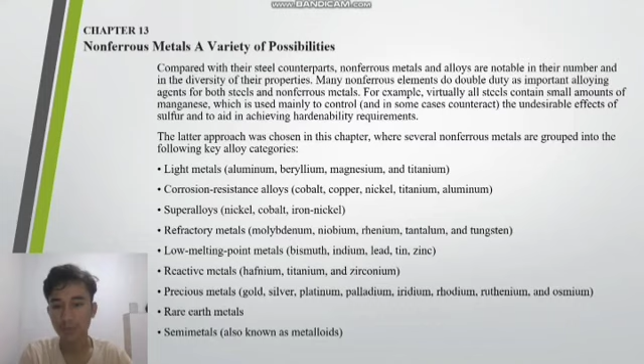The latter approach was chosen in this chapter, where several nonferrous metals are grouped into the following key alloy categories: light metals: aluminium, beryllium, magnesium, and titanium. Corrosion resistant alloys, that is copper, nickel, titanium, aluminium. Superalloys, that is nickel, cobalt, iron-nickel. Refractory metals: molybdenum, niobium, rhenium, tantalum, and tungsten.

Low melting point metals: bismuth, indium, lead, tin, zinc. Reactive metals: hafnium, titanium, and zirconium. Precious metals like gold, silver, platinum, palladium, iridium, rhodium, ruthenium, and osmium. Rare earth metals; semi-metals, also known as metalloids. Next,

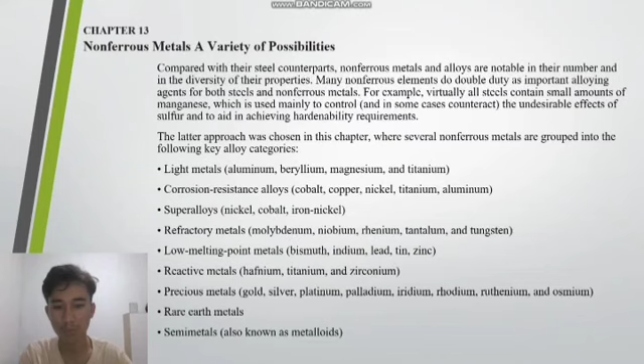13.1 Light metals. High strength, lightweight alloys are of great importance in engineering applications for use in land, sea, air, and space transportation. 1 kilogram or 2.2 lb of metal saved in the design and construction of such a system can result in important weight savings in power plants, transmission systems, and in total fuel requirements. There is a strong demand for high strength, lightweight metals and alloys.

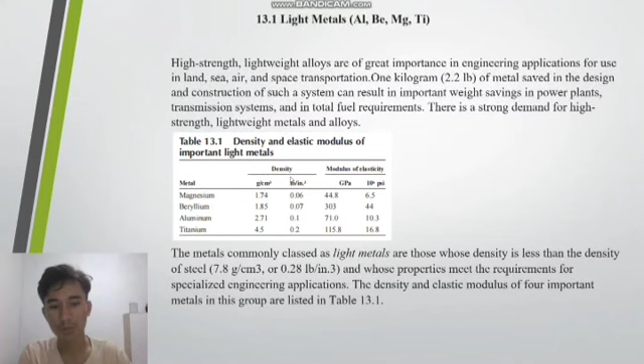This is table 13.1. The metals commonly classed as light metals are those whose density is less than the density of steel, or 7.8 grams per cubic centimeter, or 0.28 lb per in³, and whose properties meet the requirements for specialist engineering applications. The density and elastic modulus of 4 important metals in this group are listed in table 13.1.

Next, magnesium, or Mg, has long been recognized as the lightest structural metal. Structural applications include industrial, materials handling, commercial and aerospace equipment. In industrial machinery, such as textile and printing machines, magnesium alloys are used for parts that operate at high speeds and thus must be lightweight to minimize inertial forces. The use of magnesium in materials handling equipment includes applications for dockboards, grain shovels, and gravity conveyors. Next,

13.2 Corrosion resistant alloys. Nonferrous metals and alloys are widely used in corrosive environments. At one end of the spectrum, they are used for water piping and food preparation. At the other end, they are vital to operation of many chemical plants dealing with aggressive acids and alkalis. Historically, titanium alloys have been used instead of iron or nickel alloys in aerospace applications because titanium saves weight in highly loaded components that operate at low to moderately elevated temperatures.

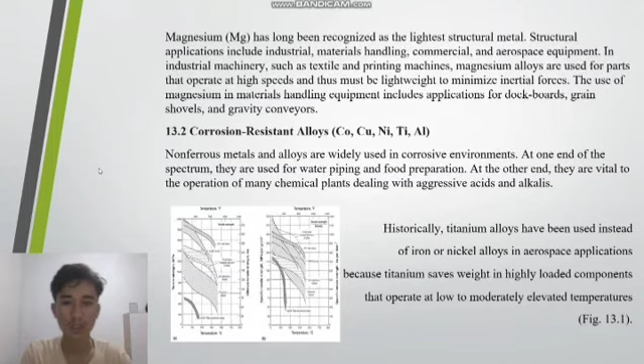That is figure 13.1. Next, cobalt or Co is used as an alloying element in alloys for various applications such as permanent and soft magnetic materials, superalloys for creep resistance at high temperature, hardfacing and wear resistant alloys, corrosion resistant alloys, high speed steels, tool steels and other steels, cobalt based tool materials, electrical resistance alloys, high temperature spring and bearing alloys, magnetostrictive alloys, special expansion and constant modulus alloys, biocompatible materials for use as orthopedic implants or dental materials.

Because the passivity of titanium stems from the formation of a stable oxide film, an understanding of the corrosion behavior of titanium is obtained by recognizing the conditions under which this oxide is thermodynamically stable. The Pourbaix or potential-pH diagram for the titanium-water system at 25 degrees Celsius or 77 degrees Fahrenheit is shown in figure 13.3, and depicts the wide regime over which the passive TiO2 film is predicted to be stable based on thermodynamic or free energy considerations.

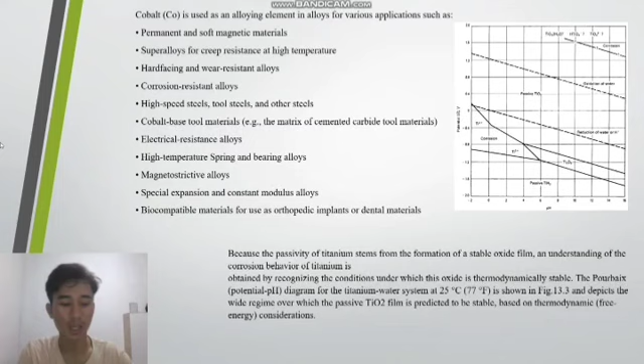Next, 13.3 Superalloys. Superalloys are a group of nickel-based, cobalt-based, and iron-nickel-based alloys that exhibit outstanding strength and surface stability at temperatures up to 85% of their melting point or Tm, expressed in degrees Kelvin, 0.85 Tm Kelvin. The iron-nickel-based superalloys are an extension of stainless steel technology and generally are wrought, whereas cobalt-based and nickel-based superalloys may be wrought or cast. Depending on the application or composition involved, cast single crystal forms are often produced for aircraft applications. Superalloys are intended to prevent or minimize creep deformation at high temperature.

Figure 13.5. They all have a face-centered cubic or FCC austenitic structure. Iron and cobalt both undergo allotropic transformations and become FCC at high temperature or with alloying. Nickel, on the other hand, is FCC at all temperatures. In superalloys based on iron and cobalt, the FCC forms of these elements generally are stabilized by alloying additions.

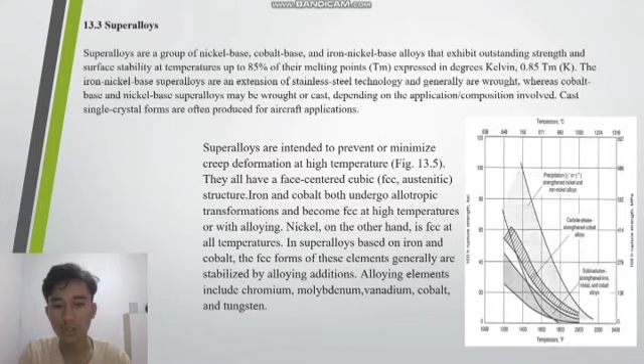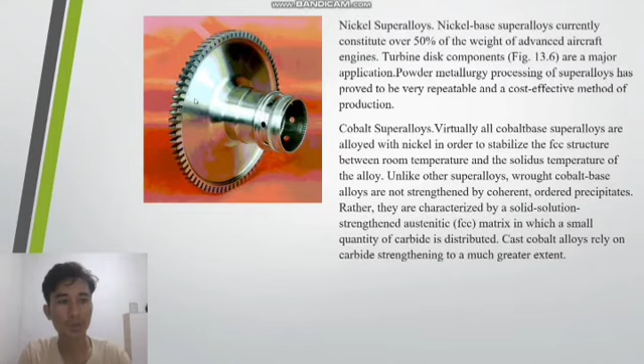Alloying elements include chromium, molybdenum, vanadium, cobalt, and tungsten. Next, nickel superalloys. Nickel-based superalloys currently constitute over 50% of the weight of advanced aircraft engines. Turbine disk components, figure 13.6, are a major application. Powder metallurgy processing of superalloys has proved to be a very repeatable and cost-effective method of production.

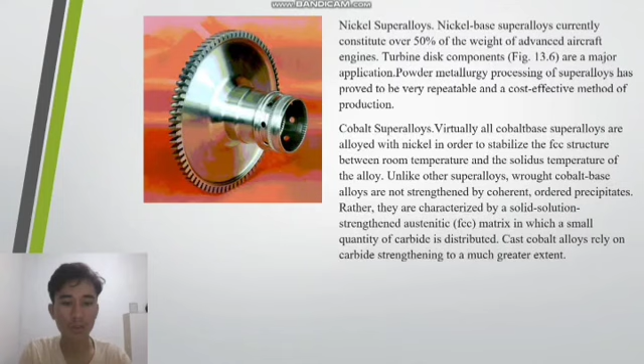Cobalt superalloys. Virtually all cobalt-based superalloys are alloyed with nickel in order to stabilize the FCC structure between room temperature and the solidus temperature of the alloy. Unlike other superalloys, cobalt-based alloys are not strengthened by coherent ordered precipitates. Rather, they are characterized by a solid solution strengthened austenitic or FCC matrix, in which a small quantity of carbide is distributed. Cast cobalt alloys rely on carbide strengthening to a much greater extent.

13.4 Refractory metals. This family has 5 members, that is niobium, also referred to as columbium, tantalum, molybdenum, tungsten, and rhenium. With the exception of two platinum group metals, osmium and iridium, refractory metals have the highest melting temperatures of all metals. Tungsten has the distinction of having the highest melting temperature of all elements, 3,410 degrees Celsius or 6,170 degrees Fahrenheit.

Molybdenum, or Mo, has a relatively high melting temperature of 2610 degrees Celsius or 4730 degrees Fahrenheit, along with a high modulus, good creep strength, and the retention of mechanical properties at high temperatures. Molybdenum is primarily used as an alloying addition in iron, steel, superalloys, and corrosion-resistant alloys to improve hardenability, toughness, abrasion resistance, strength, and resistance to creep at elevated temperatures.

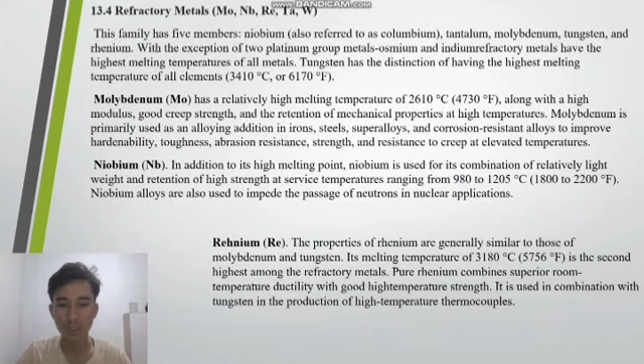Rhenium. The properties of rhenium are generally similar to those of molybdenum and tungsten. Its melting temperature of 3180 degrees Celsius or 5756 degrees Fahrenheit is the second highest among the refractory metals. Pure rhenium combines superior room temperature ductility with good high temperature strength. It is used in combination with tungsten in the production of high temperature thermocouples.

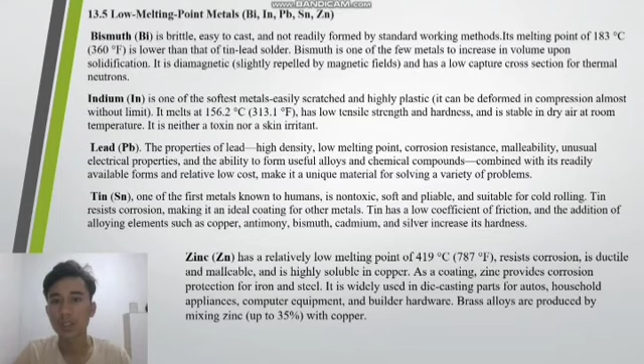Next, 13.5 low melting point metals. Bismuth, or Bi, is brittle, easy to cast, and not readily formed by standard working methods. Its melting point of 183 degrees Celsius or 360 degrees Fahrenheit is lower than that of tin-lead solder. Bismuth is one of the few metals to increase in volume upon solidification. It is diamagnetic, slightly repelled by magnetic fields, and has a low capture cross-section for thermal neutrons.

Indium is one of the softest metals, easily scratched and highly plastic. It can be deformed in compression almost without limit. It melts at 156.2 degrees Celsius or 313.1 degrees Fahrenheit, has low tensile strength and hardness, and is stable in dry air at room temperature. It is neither a toxin nor a skin irritant.

Lead. The properties of lead: high density, low melting point, corrosion resistance, malleability, unusual electrical properties, and the ability to form usable alloys and chemical compounds, combined with its readily available forms and relatively low cost, make it a unique material for solving a variety of problems.

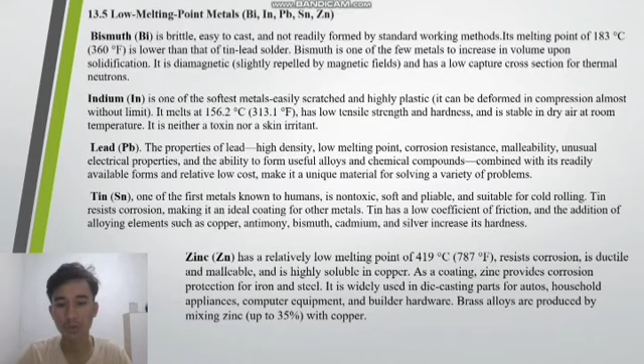Zinc has a relatively low melting point of 419 degrees Celsius or 787 degrees Fahrenheit, resists corrosion, is ductile and malleable, and is highly soluble in copper. As a coating, zinc provides corrosion protection for iron and steel. It is widely used in die casting parts for autos, household appliances, computer equipment, and builders' hardware. Brass alloys are produced by mixing zinc up to 35% with copper.

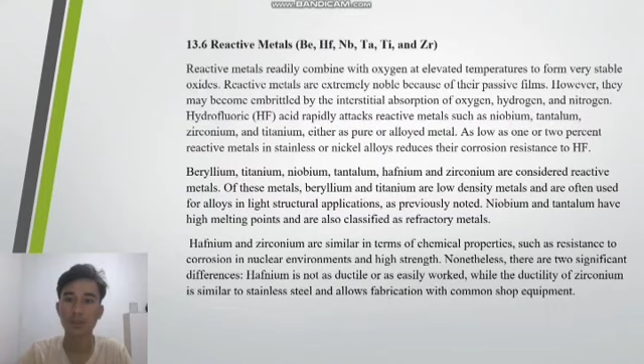Next, 13.6 Reactive metals. Reactive metals readily combine with oxygen at elevated temperatures to form very stable oxides. Reactive metals are extremely noble because of their passive films. However, they may become embrittled by the interstitial absorption of oxygen, hydrogen, and nitrogen. Hydrofluoric, or HF, acid rapidly attacks reactive metals such as niobium, tantalum, zirconium, and titanium, either as pure or alloyed metal. As little as 1 or 2% reactive metals in stainless or nickel alloys reduces their corrosion resistance to HF.

Beryllium, titanium, niobium, tantalum, hafnium, and zirconium are considered reactive metals. Of these metals, beryllium and titanium are low-density metals and are often used for alloys in light structural applications. As previously noted, niobium and tantalum have high melting points and are also classified as refractory metals. Hafnium and zirconium are similar in terms of chemical properties, such as resistance to corrosion in nuclear environments and high strength.

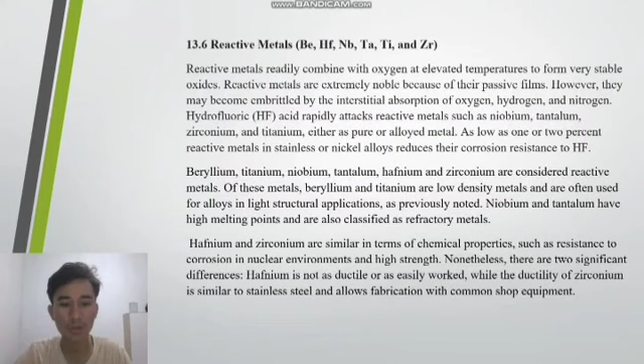Nonetheless, there are two significant differences. Hafnium is not ductile or easily worked, while the ductility of zirconium is similar to stainless steel and allows fabrication with common shop equipment.

Next, 13.7 Precious metals. Eight metals are in the family. Two of them, gold and silver, require little or no introduction. Not so well known are the six platinum group metals, which commonly occur together in nature: platinum, palladium, iridium, rhodium, ruthenium, and osmium.

Gold is extremely soft, ductile, and easy to deform. Chemically pure gold is 99.9% pure, and higher purity is commercially available. Resistance to oxidation is its outstanding property. Its yellow color is maintained in air or when heated. Gold is usually alloyed to increase its hardness because chemically pure gold is simply too soft for use in common applications such as jewelry.

Silver. Among metals, pure silver has the highest thermal and electrical conductivity. Next to gold, it is the most ductile. Silver is also one of the most corrosion-resistant metals. It can be worked, extruded, rolled, swaged, and drawn. Representative uses include electroplated ware, sterling ware, jewelry and arts, photography, mirrors, batteries, coins, and catalysts, which accelerate reactions in processing.

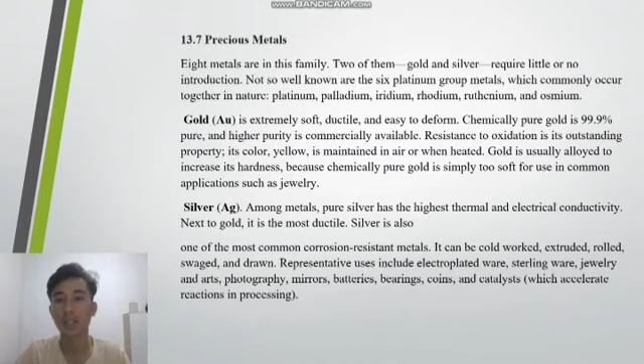Next, 13.8 Rare earth metals. Representative properties. Some rare earths can be fabricated cold, are poor conductors of electricity, and are paramagnetic, having little mutual magnetic attraction. Below room temperature, some are strongly ferromagnetic, having strong mutual magnetic attraction. Some form a thin oxide film under ordinary atmospheric conditions. As a family, the rare earths do not have properties that suggest usage as structural alloys.

Scandium is similar to aluminum in density, while yttrium has a density similar to that of titanium and a melting point of 1522 degrees Celsius or 2772 degrees Fahrenheit, which allows a passage of neutrons. Samarium forms a protective oxide film in air at temperatures up to approximately 595 degrees Celsius or 1100 degrees Fahrenheit.

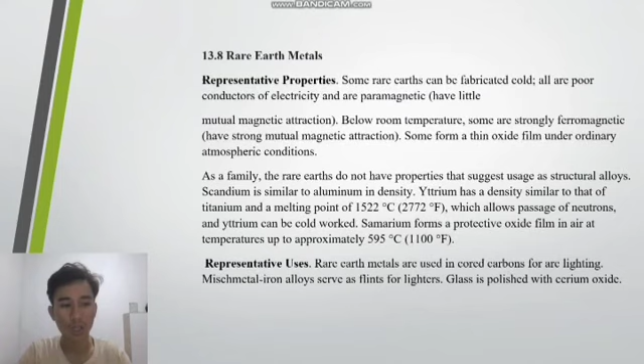Next, 13.9 Metalloids or semi-metals. Silicon used in industry can be classified into metallurgical and semiconductor grades. Metallurgical grade silicon is produced by the reduction of sand in an electric arc furnace, with a content of approximately 98% Si. Metallurgical grade silicon is used primarily in the aluminum, steel, and silicone industries.

Gallium, or Ga. The chemical properties of gallium are between those of aluminum and indium, and like these elements, gallium is considered a non-toxic substance. Its melting point is 29.78 degrees Celsius or 85.6 degrees Fahrenheit. Like aluminum, gallium forms an oxide film on its surface when exposed to air. Like water, bismuth, and germanium, it expands on freezing.

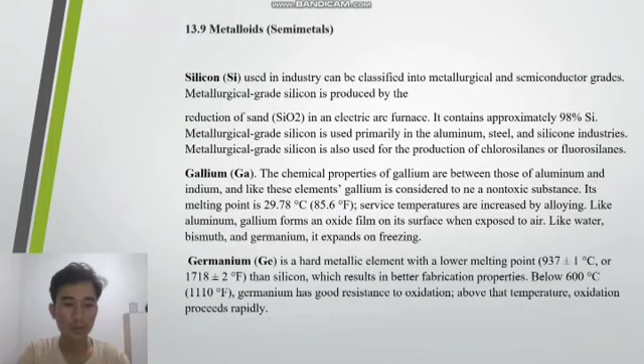Germanium is a hard metallic element with a lower melting point, that is 937 plus or minus 1 degree Celsius or 1718 plus or minus 2 degrees Fahrenheit, than silicon, which results in better fabrication properties. Below 600 degrees Celsius or 1110 degrees Fahrenheit, germanium has good resistance to oxidation. Above that temperature, oxidation proceeds rapidly.

Next, 13.10 Special purpose metals and alloys. Uranium, or U, is a moderately strong and ductile metal that can be cast, formed, and welded by a variety of standard methods. It is used in non-nuclear applications largely because of its high density, 68% greater than that of lead. Uranium and its alloys generally are considered difficult to machine, requiring special tools and conditions.

Next, vanadium. The melting point of vanadium is 1900 plus or minus 25 degrees Celsius. It is chemically active and closely related to niobium, tantalum, titanium, and chromium. Vanadium is soft, ductile, and strong, and has good resistance to atmospheric corrosion and hydrochloric and sulfuric acid environments. Its cold working properties are excellent. In hot working, vanadium must be heated in an inert gas atmosphere.

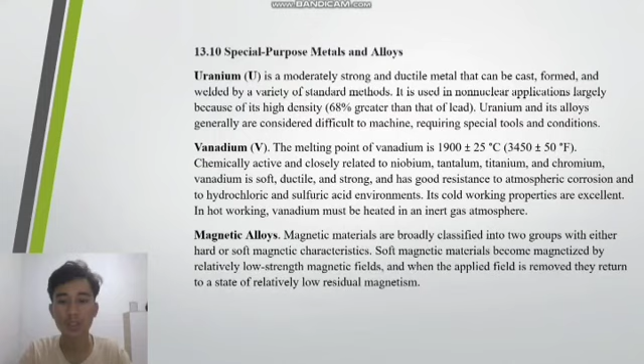Magnetic alloys. Magnetic materials are broadly classified into two groups with either hard or soft magnetic characteristics. Soft magnetic materials become magnetic by relatively low strength magnetic fields, and when the applied field is removed, they return to a state of relatively low residual magnetism.

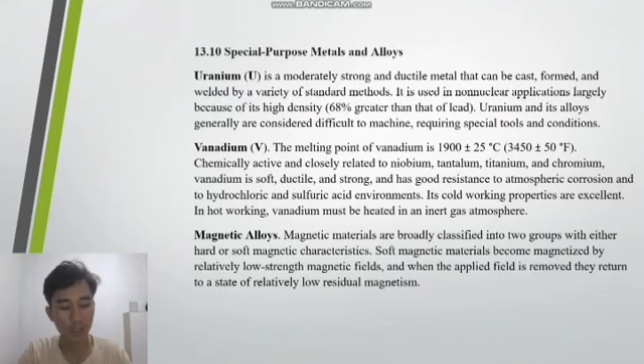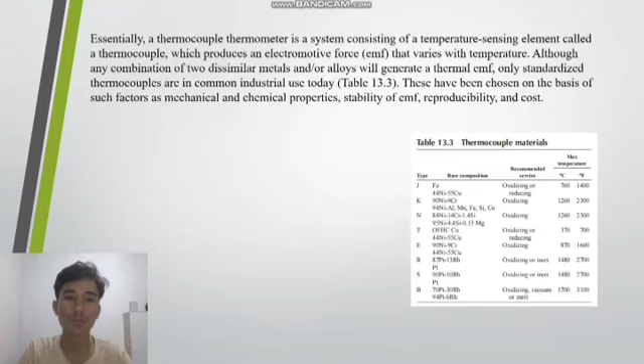Next, essentially, a thermocouple thermometer is a system consisting of a temperature sensing element called a thermocouple, which produces an electromotive force that varies with temperature. Although any combination of two dissimilar metals and/or alloys will generate a thermal EMF, only standardized thermocouples are in common industrial use today, Table 13.3. These have been chosen on the basis of such factors as mechanical and chemical properties, stability of EMF, reproducibility, and cost.

Okay, I think that's what I can explain about chapter 13. If there are errors in reading, please forgive me.